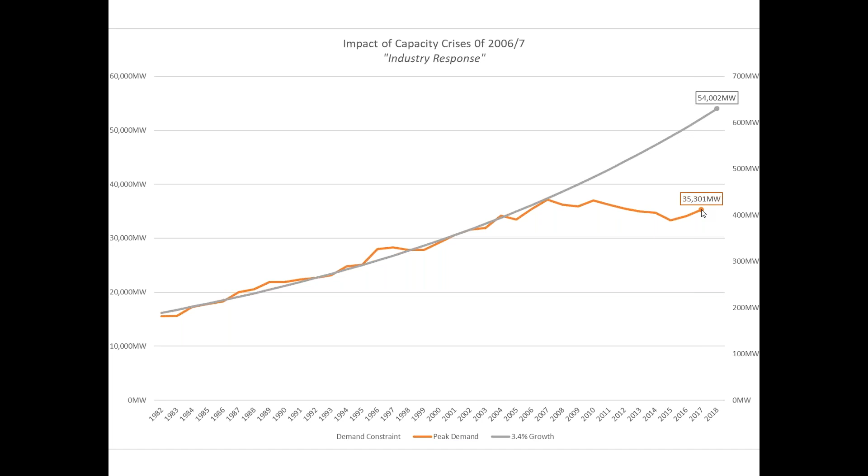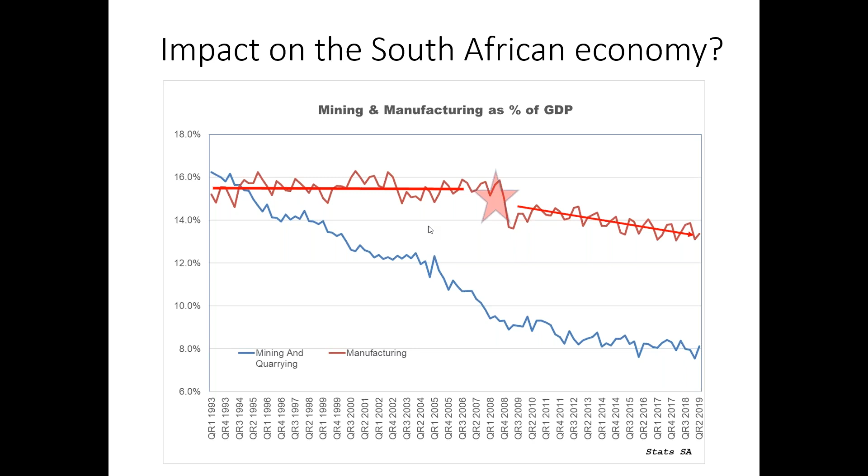So that's a very grim picture, but it says that power supplies are fundamental in it, and not having enough power drives the economic growth down. And then when you say there's been no demand, therefore there's no need for new power stations, that is actually back to front. You've got to get the economy back into a state where there is excess capacity so that we can meet the needs of industry. And as power plants take longer to put in than industrial plant normally, you've got to be ahead of the industrial growth.

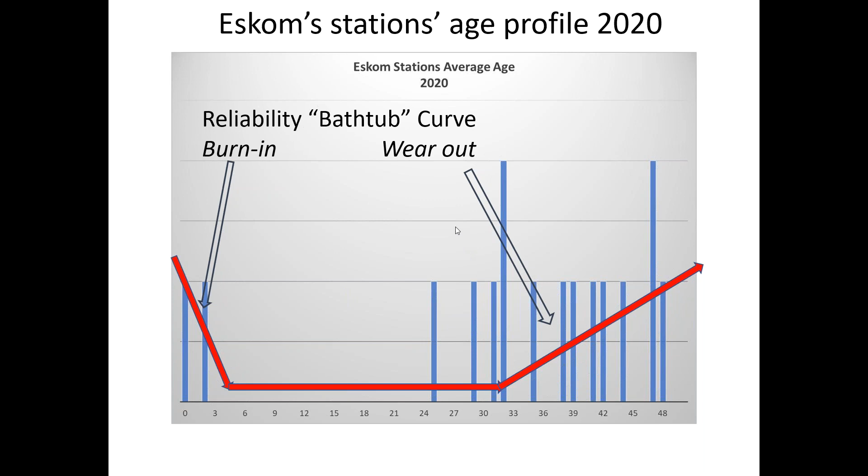So if you understand that logic, then it says that we're probably in the worst possible situation now, in that we've got some stations that are brand new and unreliable, and everything else is beyond the end of its real nominal design life. By 2030, you've got even more stations falling off the right-hand end of the graph. Medupi-Kusile will be back to being reliable. And this is the reason you haven't seen Medupi-Kusile essentially making up the problems in the grid now, because they've been unreliable for different reasons than the older stations. And that's probably the situation we're sitting in now.

And realistically, what alternatives have we got? Well, here's the graph that should scare all policymakers in South Africa. I'm not going to get in the debate about CO2 and climate change, but it's a political fact, and you can argue about the science. I certainly have no opinion on that. But it's politically a truth that you cannot, as a trading country in the modern world, say we don't care about CO2 emissions.

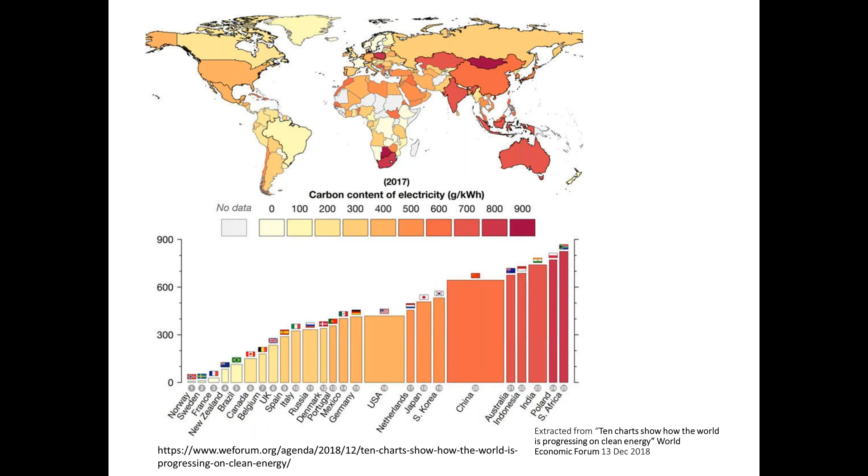And everyone will tell me, well, natural gas is a solution. Now, okay, we may have natural gas on the south coast, and clearly natural gas is dispatchable. But here comes the interesting question. Natural gas is not quite as innocent as it's made out to be. Now, this is the reference at the bottom. This is looking at the fact that because natural gas in the atmosphere has about 80 times the impact of CO2, the leakage of natural gas into the atmosphere from the supply chain, from the well through to the power station, actually is a very big CO2 emitter. Well, a big CO2 equivalent.

What's interesting is that methane, it's methane we're talking about, breaks down much faster than CO2 does. It has a much more marked effect in the shorter term than the longer term. So methane will decay in the atmosphere far faster. So it has a different impact over a 20-year average versus, say, 100-year. This is the percentage of leakage you require.

So for pure heating to replace coal, if you've got 2.2% leakage of unburnt natural gas, you actually are as bad as the coal you're replacing. Electricity is better, it's 4%, and it's better because coal is less efficient than gas for electricity. A coal station is, say, 35% thermal efficiency, and a combined cycle gas turbine can be up to mid-50% efficiency.

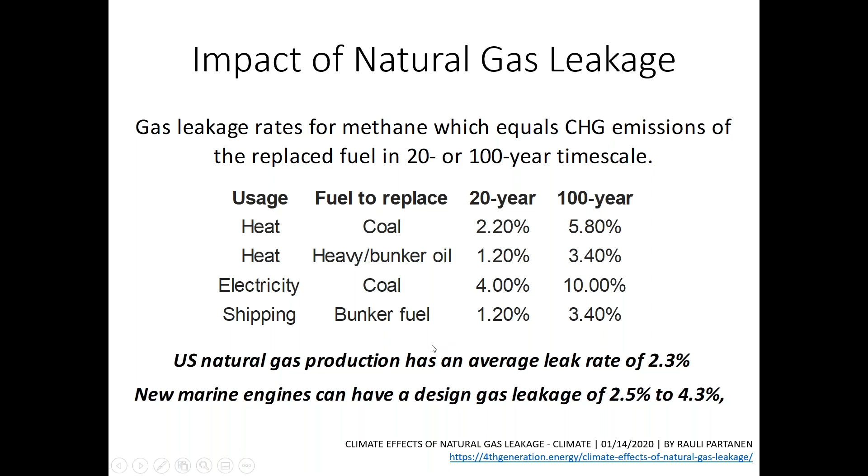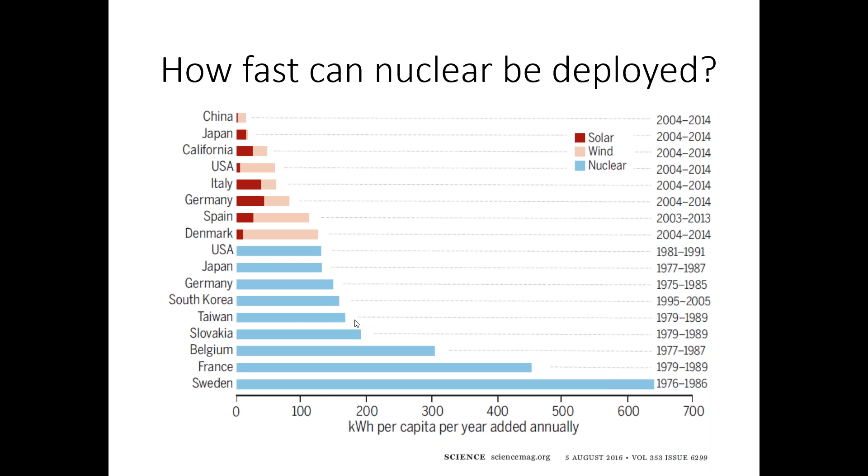So you can see Germany there, which has done major activity up to 2014, has not made anywhere near the impression that, for example, Sweden did over a 10-year period. And this is one bit of data. I'll give you the next bit of data: just how long it takes to build a nuclear power station. People regularly quote 10 years and all these things. This actually is the data for major programs in the world: China, France, Korea, UK, US. And what you can see is that about 5 years, 60 months, is about the long-term average for a well-run program.

We could discuss easily why the US program went off the rails post Three Mile Island, about '79, and just lost control of their projects. You can see the end of the French program was particularly poor. You can see the UK program, which was good back in the early days, went badly wrong at the end. So the wind down is difficult in a nuclear program, or appears to be. But you can see that the stable build programs, the Chinese, the Koreans, the French in the middle of the build program, are pretty consistently around a 5-year construction time.

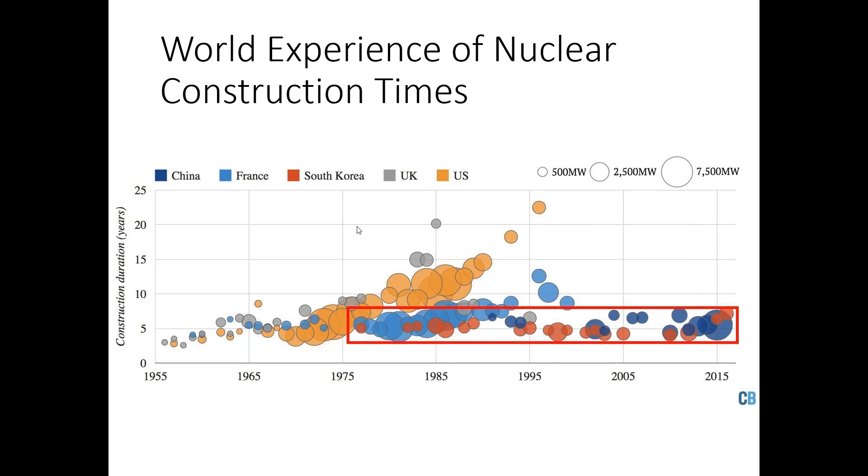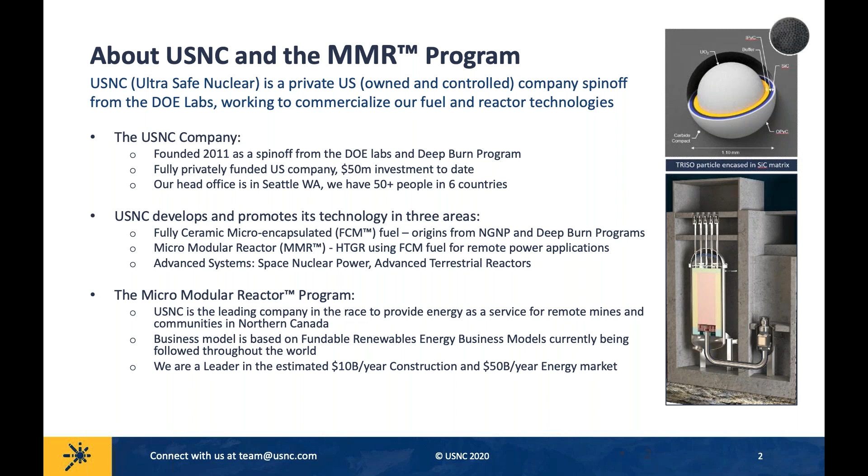So the real question is why? We have ways to decarbonize electricity. We can generate power today. It's not a small lift bringing a new technology to market. Why do it? And I think there are two thoughts that I would share there. The first is we don't believe in doing something if we're not addressing a real and immediate need. And we also want to see what we do to address the real immediate need not to be a dead end, but to have a potential for growth and to make a bigger impact.

And I realized while discussing the world of nuclear with policymakers that a lot of the ideas that we have are not yet valid policy options, in that they're not real. You can't buy them off the shelf. And I think it's an absolutely key point in our development life cycle where we are with small nuclear, getting over that hurdle, going from paper and ideas and PowerPoint, more likely PowerPoint and Zoom calls right now, to actual implementable, purchasable products.

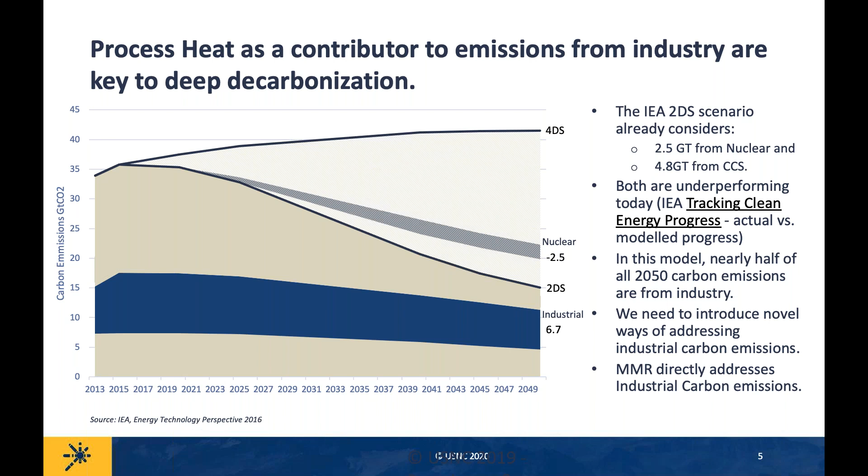So a little bit about our technology. I'm just going to put this slide up here and draw your attention to the QR code. If you want to take a look at this and play with it, we have an app which creates an augmented reality version of the plant, which you can click around and examine, and can give you a bit of a better feeling for what we're talking about. The link in the QR code will take you to the tabletop MMR app.

This is a typical plant for remote power. This is 2 reactors. It will generate about 10 megawatts of electricity. The remote power market is interesting. What we know is that we cover about 90% of the market if we can generate between 5 and 50 megawatts electricity, and that would be 1 through 10 modules.

What you'll also see here that's interesting is that this is set up for high availability. We still have some backup diesel generators. Those are absolutely not, like in the case of a current nuclear plant, in any way associated with the nuclear plant. They really are so that if we take a nuclear unit offline for maintenance, we can keep providing high availability power to our clients.

Some other interesting features: these reactors are designed for a core lifetime of 20 years. They're not refueled; they're deployed, operated, and then broken down. You could extend the lifetime of the plant if you wanted. That's absolutely simple to do.

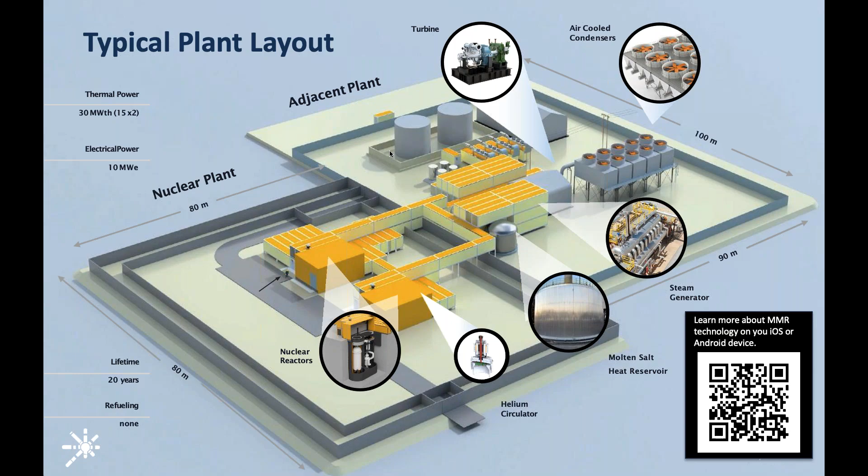Our key technology that this plant is based on is fully ceramic microencapsulated fuel. Essentially, this is probably going to be the toughest nuclear fuel you can buy. And really the idea that we have, and the name of our company, UltraSafe, reflects this as a challenge both to ourselves and the industry, is that nuclear safety needs to be ensured from the inside out. And when we talk about nuclear safety, really the key thing that differentiates a nuclear plant from any other generator is the creation of radioisotopes, fission products, which can have harmful health consequences if released to the environment or the public.

And the idea behind this fuel, which is based on probably 50-year-old technology of TRISO fuel, is embedding it not just in a convenient matrix, a graphite matrix, but actually embedding it in silicon carbide, which is an extremely robust and resilient material. In fact, it's one of the key protective elements of TRISO, is that you can set up fuel that, when used in a reactor like ours, cannot be compromised. So it's not eliminated by argument, it's practically eliminated. This is absolutely eliminated. There's literally not enough energy in the system to damage the fuel. And that means that the radioactive fission products stay in, and that gives you a very different approach to safety to the generation of reactors that operates today.

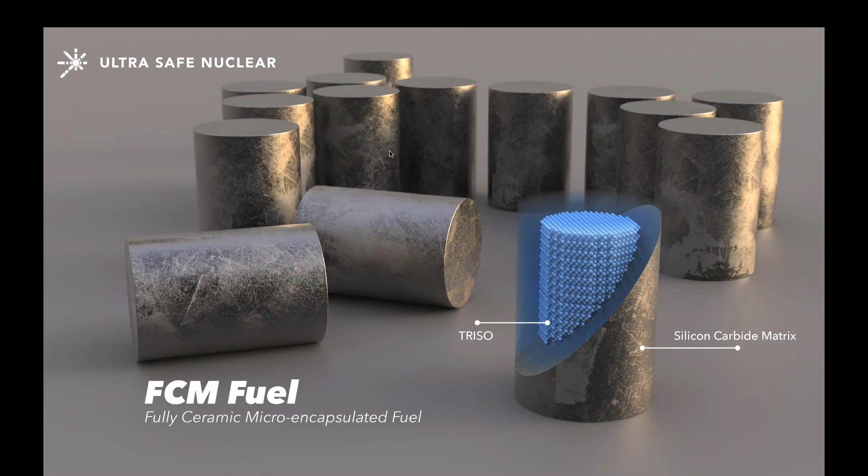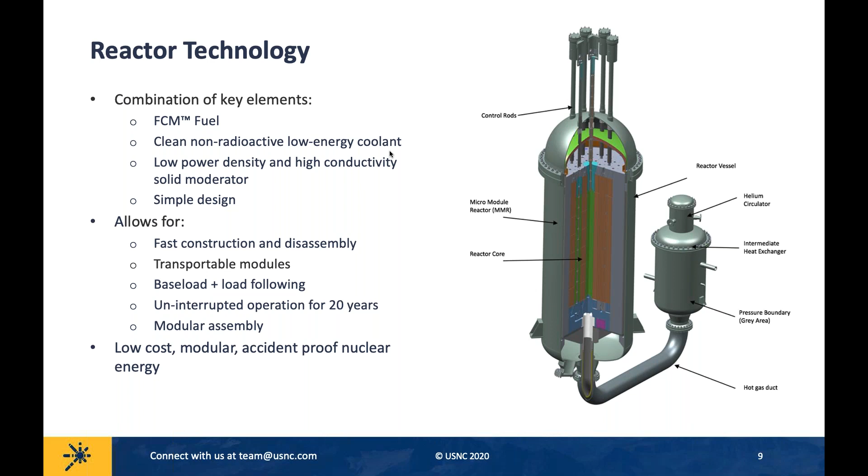The reactor is very simple. If you've ever looked at gas-cooled reactors, this will almost look like a picture from a textbook. But this is our core system. This is our nuclear system, the nuclear heat supply system, we call it. I apologize, we're engineers, so things are called what they are. But the simplicity here is almost hard to explain. I think the easiest way I found to explain this is say that the entire NHSS has 10 moving parts. And that is probably about as simple as you can get it. It essentially has very simple characteristics from the perspective of control. There's really very little to it that is new, and really our decision choices here were made about getting to the market quicker, getting the plants operating, rather than trying to design the most advanced and specialized technology.

A question we get a lot is, is this really a first of a kind reactor? Is it new? What I'd say is that the second commercial reactor built, '58 if I recall, was a gas-cooled reactor. So gas-cooled reactors are nothing new. High temperature gas-cooled reactors, also about 60 years old. In fact, today in the world, there are 2 reactors using the same technology and the same class that are operating. And in fact, between those reactors, they completely envelope the design parameters for this reactor. So I think it's a different way of doing something that exists. I think there's a lot of room to improve things, but fundamentally, this is not a new technology. And I think the reason why we chose that again is to simplify our path to applications.

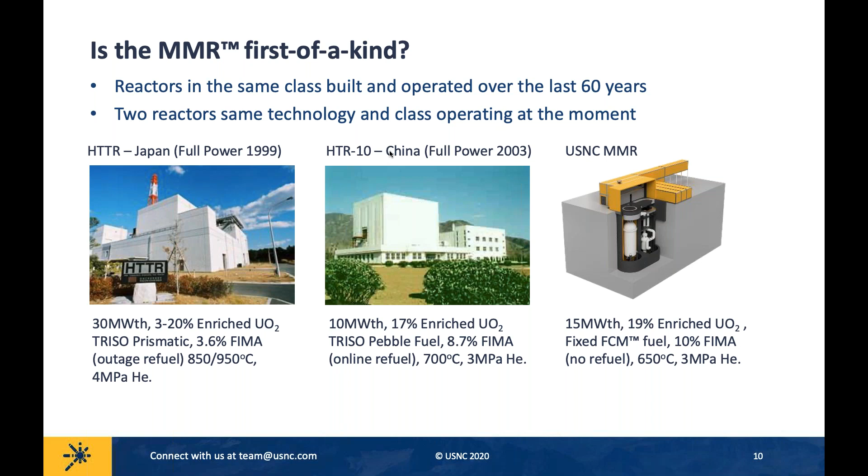So I'm always in the awkward position of a tech company, a new nuclear guy, explaining there's nothing new. But that's also not entirely true. I think we've restricted our innovation to areas that matter. The first is the fuel, the fully ceramic microencapsulated fuel, because that just brings such good improvements in safety and operations that it's worth it. The second, of course, as I mentioned, is using the molten salt intermediate heat transport loop. And I'd point out that this was an idea we even had back at PBMR. This is not an absolutely new idea. The problem is it was a science project then.

But in the 10 years between that, we have more than 3 gigawatts, in fact, I should update that because the 3 gigawatt number I use is a 2016 number, of concentrating solar power deployed. And a lot of it is now using molten salt, either for heat transfer or for energy storage. And so we've got really, really good experience there. And that was a technology that wasn't available 10 years ago. And it's maybe not as exciting as self-driving cars or drones, but it's probably as revolutionary.

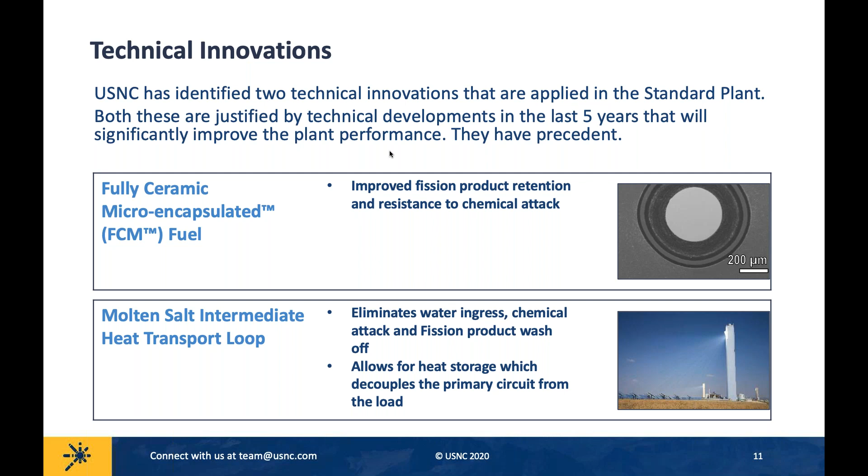Another thing that our reactor forces us to look at is modularization. And I think that this provides, microreactors, the MMR, provides an approach to modularization which is quite radical. It's not building modules the size of, well, buildings on the site and moving them into place to try and accelerate construction. It's modular on all levels, in fact.

It starts off with being very applicable for distributed generation. It allows you to use a lot of new applications, smaller quantum investment, reduced losses. It goes down to standardized units where you have plant configurations that are repeating. You get into mass production, not just repeatability on paper, but actually out of the same factory.

And then you get to modular construction, and this is absolutely necessitated by applications because our goal is to be able to deploy this over an ice road if we have to, or winter road. And that means that these modules have to be small enough to fit on the back of a truck and light enough so that they don't fall through the ice. And so that's the idea.

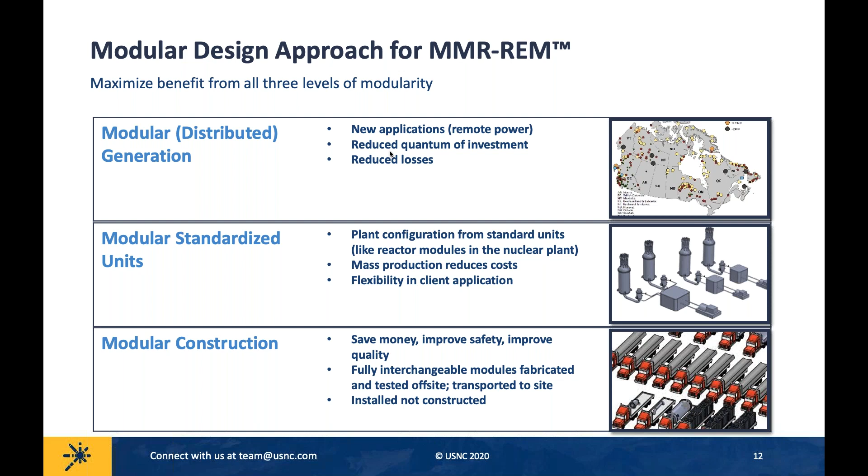And these modules are fully interchangeable, fabricated and tested off-site. And when we take them to site, we install them, we don't construct. So eliminating construction is another area where we can make a big difference to the economics of nuclear in terms of the risk profile in construction.

We are unusual. We understand that with somewhere near 160 advanced reactor concepts being touted, of which about 60 of those are SMRs, there's a lot going on in the talking space. And we don't really want to participate in that. We want to make this real. You know, an idea is only worth so much. And so that's why we're focusing our effort very much on the deployment of our first reactor.

We are the most advanced commercial Gen 4 reactor project in the world. This is a summary, and I've given some external references for those who are interested. But really, we are developing a project to deploy a reactor at Chalk River, and we're in the process of licensing that already. We've completed our vendor design review. We have been selected to receive a site for the demonstration, and we're in the process of negotiating that.

We have a licensing process underway where we're following the Canadian licensing process, and the first step in that is to secure an environmental assessment and a license to prepare site. That's been underway for, I think, 18 months now. And we have a partnership with Ontario Power Generation. The partnership's called Global First Power, and this will build, own, and operate the plant. So that's really good progress, and we expect the plant to be built on one of the following sites.

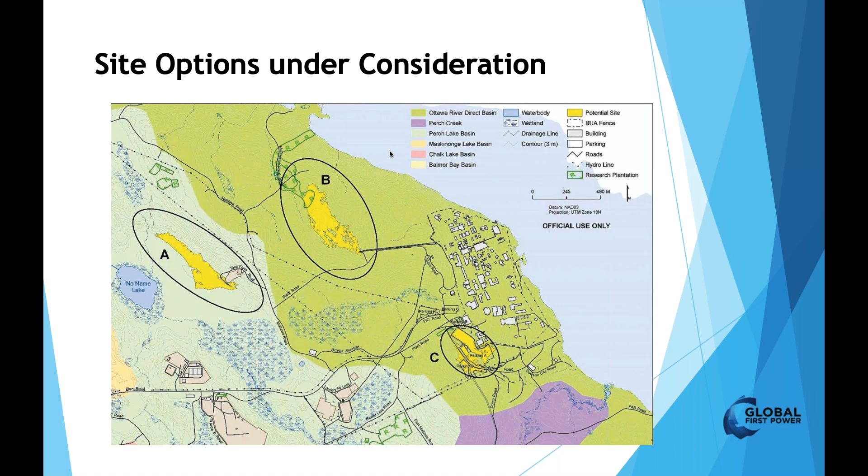Excuse me, I've switched to the GFP background just so we can see where this is sourced from. But essentially, we've got a preliminary selection of 3 sites at Chalk River we're investigating. We're in the process of doing the EIA. I'm sure that the preferred site will be announced quite soon.

And this puts us on this timeline here, which essentially will have the first-of-kind reactor, the Chalk River demonstration, operating in line with CNL's target date to have a reactor operating on the site again by 2026. Naturally, we think we'll move faster than that, but we are a little circumspect about our actual dates. There's still a lot of risk.

There are a lot of things we're going to have to overcome. There's a lot of work we have to do with public engagement and engagement of the Indigenous people, and just making sure that everything works and works on time.

So really what we think this will enable us to do, shifting gears here, is to set up probably the first vertically integrated nuclear IPP, structured like renewables, effectively. That allows us to use mass production to learn, recover initial investments, and to build these simpler, cheaper and quicker than we've ever witnessed in the industry before. And also to reduce risk, and probably the biggest factor in that is by simplifying and accelerating licensing and construction.

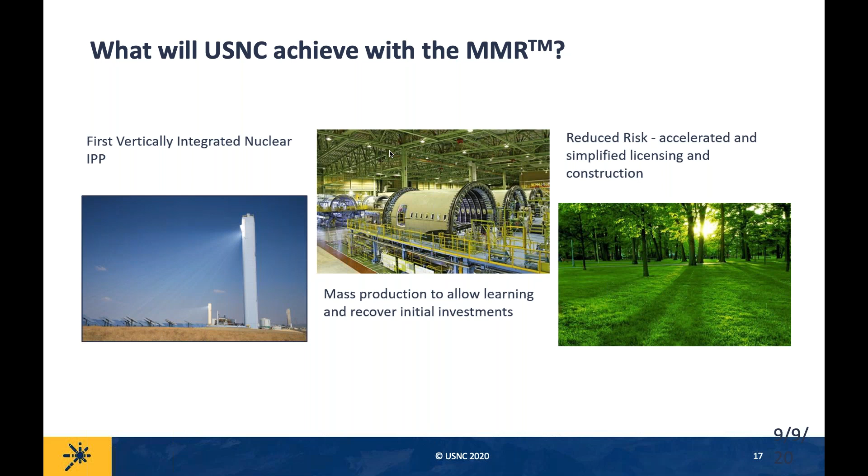So I'll leave you with these thoughts because I'm convinced that small nuclear is coming, and I think that micronuclear is probably going to be a game changer in terms of small nuclear as well. I think that what people call SMRs today are just too big. But this MMR vision of the future really changes potentially the way we deploy nuclear by a factor of 10, right?

So we start to look at development costs that are 80 million, not the 800 odd million that NuScale published. You're looking at shorter construction times, assembling the plant in 6 months, not 60 months, 5 years. A lot less work up front in project development, more like a renewables project, 10 million, not a billion. I think that if you ask anyone else on the call, the approximate investment it takes to develop a nuclear project to the point where you start construction, 1 billion is a good industry benchmark figure for a gigawatt class plant.

Less money to build the first unit. We're looking at investments in the 100 million, not the $1 billion range. And higher numbers of unit sales, 10 unit sales, hundreds of unit sales, not a single unit, or somewhere between 1 and 10. And I think these are the kind of possibilities that the work we're doing should unlock. And yeah, I think we're looking forward to seeing what the future holds.

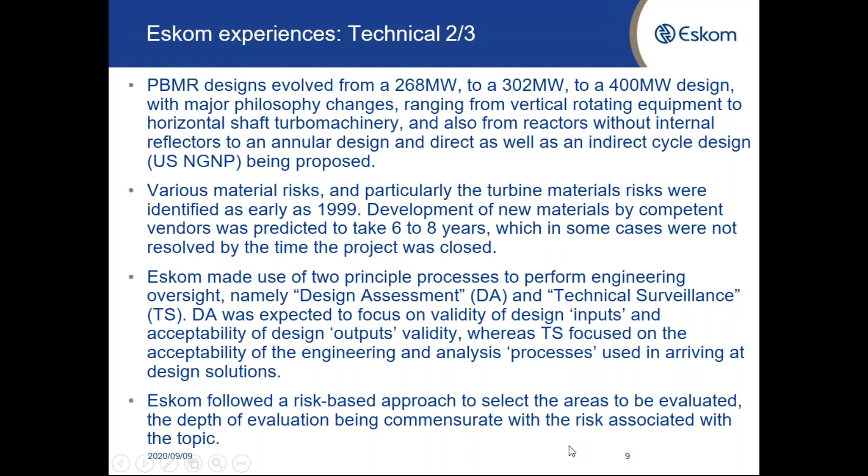Eskom followed a risk-based approach to select the areas to be evaluated, with the depth of evaluation commensurate with the risk of the topic. So some of the activities that the Eskom Client Office was involved with at the time were the codes and standards for the design and manufacture of all of the parts of the plant, specifically the reactor, the main piping and turbines, and the recuperator.

There were issues and concerns raised around the leak before break of the main piping, which was an important design issue, and also part of the safety assessment and meeting the requirements of the nuclear regulator. The reactor neutronic codes were developed and quite well matured. Fuel design and qualification, core ceramic structures qualification, turbine materials, and a number of other issues.

And it's safe to say that a lot of this had actually advanced to quite an advanced level. Fuel manufacturing had progressed quite far. The testing that has been conducted subsequent to the project being shut down has proven that the fuel manufactured in South Africa at NECSA was of a very high standard and would meet the requirements for the reactor. So that is the basis, I believe, on which a lot of confidence can be created.

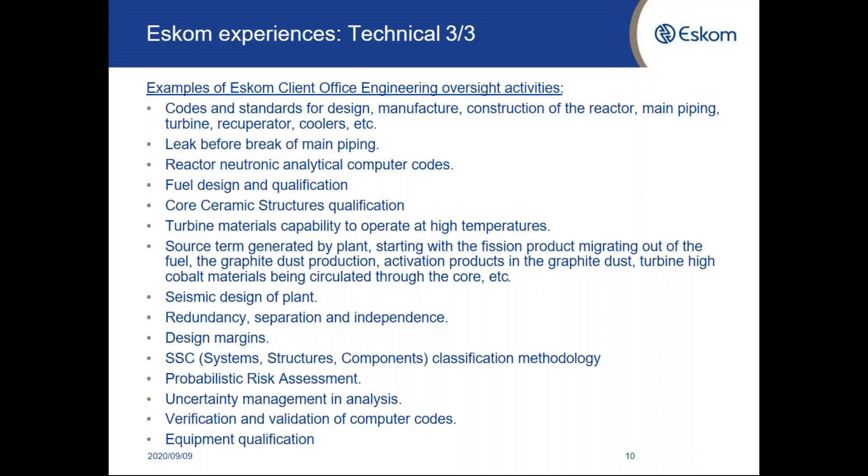So in conclusion, the evolution of the legislation worldwide has given rise to what we now call generation 1, 2, 3, and 4 type reactors. The most popular design, Koeberg Power Station being one of them, the pressurized water reactor, and reactors of a similar design can at best achieve generation 3 status. The high temperature gas reactors, such as the pebble bed, can comfortably meet the generation 4 requirements. And that was really the bottom line why the HTGR was and still is a highly attractive option for the future.

PBMR, because of its reactor safety benefits, is still an excellent option for the future. What it does take, though, is getting through the demonstration of your first reactors and the licensing thereof, and that is where the world today sits with nearly all of the reactors currently on the table: to demonstrate and license those reactors and then construct them. And we're looking at about 5-6 years into the future to get that ready to run those plants and to commercialize the technology.

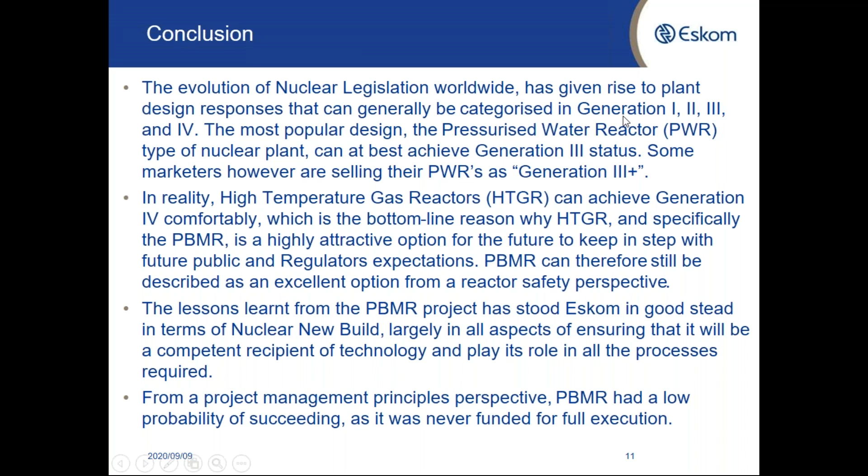Excellent presentation. I clearly have a lot of interest in PBMR because of technology that I was involved with from the beginning. And I think it just indicates how forward-thinking that project was. It's just a pity we didn't get the thing through to the end. And that's a debate for a long time.